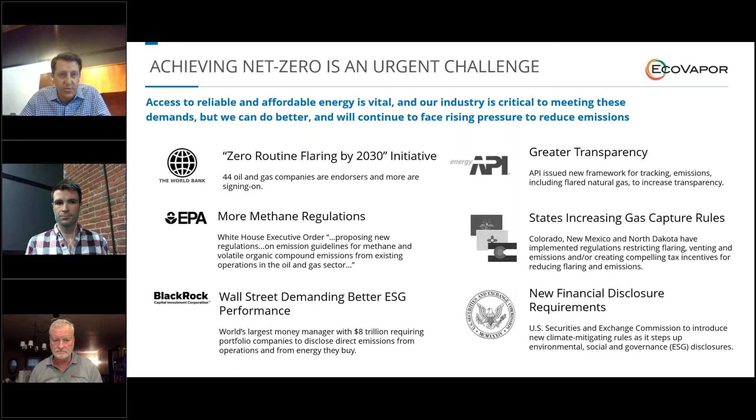A few statistics for you guys that we always like to start with here: first off, 40% of our carbon footprint in the industry is coming from venting, flaring, and fugitive emissions. So you're talking about 3 billion tons of CO2e emitted by the upstream industry annually, 80% of that stemming from the production process. And then 60% of that 80% is really focused on what we would call waste emissions - this is flaring, this is venting, this is your fugitive emissions.

We sit here saying, well, why waste these energy resources that we've worked so hard to produce? Why emit what we can sell? This is at the heart of who we are and the heart of what we do. So EcoVapor, we offer solutions to eliminate natural gas flaring and venting, and our goal is actually quite simple: sell more, waste less.

I think one of the things that we're very proud of is our value proposition that we like to talk through with our customers: one, that we can take a meaningful bite out of these emissions that come from our production process, but in the process, we also offer compelling ROI to our customers. We think this dual value proposition is powerful and something that we're very proud of.

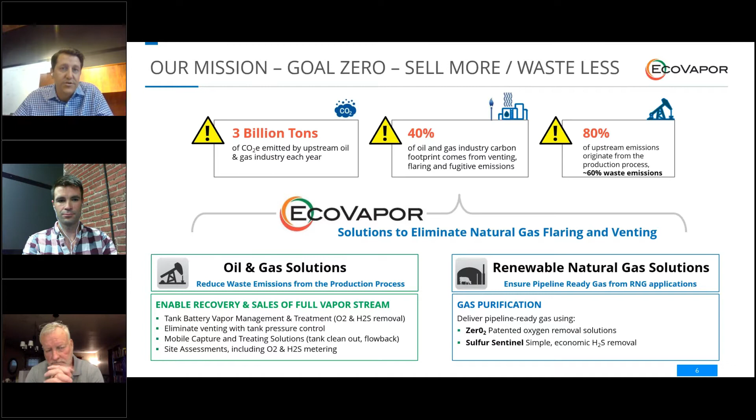Ultimately what we do, we offer products and solutions that are here to enable increased sale and decreased emitting of natural gas in both the oil and gas vertical, but as well as we've started our early focus on the renewable natural gas space as well - applications like landfill gas, applications like biogas, including swine, dairy, etc. But at the end of it, what we do, these products are all centered around the safe capture and treatment of gas to enable it for sale.

There's a variety of causes that can lead to what we would call your routine flaring and or venting. Probably the number one cause is just straight lack of takeaway capacity, gas takeaway capacity. So this is something that we've been addressing pretty aggressively in the lower 48 here in the US. You see more and more gas takeaway capacity in the major oil producing basins.

But another major contributor to why we flare and vent gas, and probably less talked about, is the contamination of these gas streams. Ultimately, if you're a midstream provider, or if your pipeline has specs and you fail to meet your oxygen or your H2S specs and you want to sell that gas, or if you want to continue producing, a lot of time your asset can get shut in because this gas is off spec.

And so these contaminants can come from a variety of sources. If you're talking about H2S, sometimes oxygen, it can come from the reservoir itself. But then if you look at the production process, you look at the tanks, you look at the tank loading, you look at some of these situations, air has a funny way of finding its way into these production processes, whether we like it or not, no matter how hard we try to keep them out.

And there are existing processes that we use to try to deal with some of these problems. You've looked at techniques probably like a gas blanket, where you increase the gas inside of the tank to try to keep some of this air out. That oftentimes can lead to venting if you have any type of surge in production. At the same time, it doesn't help in the truck loading process. You look at VRTs, a good tool to help separate some of these vapor streams, but it's all upstream of the tanks, and so you're still ignoring all of this gas that's downstream of the tank.

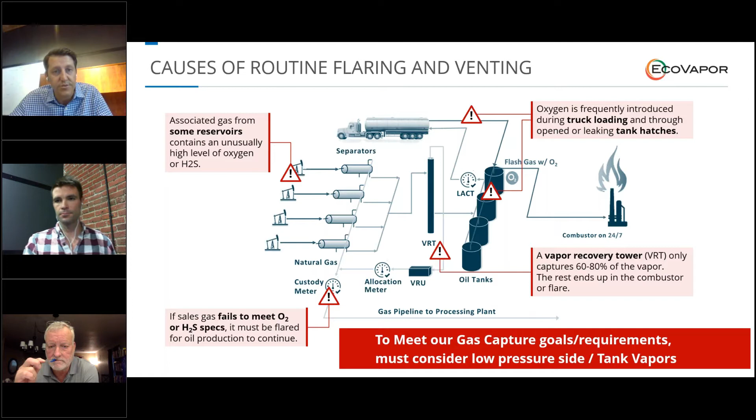So just to give you a little bit of a deeper dive on some of the products and solutions that we have, all centered once again around our theme of eliminating natural gas flaring and venting. As you can see, we focus largely on the oil and gas vertical and the renewable natural gas vertical.

Starting off here, tank battery vapor management. We have the ability to enable 100% gas capture. A lot of this is enabled by our ZerO2 product line, which we're here to talk about today, including the launch of the E100. This is centered around the ability to remove that oxygen from these gas streams, and ultimately enable 100% sales.

We also have an H2S solution, our Sulfur Sentinel, that is now out in a variety of applications in the oil and gas space, as well as renewable natural gas space. And then we also have solutions that can help to eliminate venting, and this is all based upon tank pressure control, the ability to use things like makeup gas and a blower to make sure we're managing that right pressure window to ensure that we are not venting from our tanks.

In addition, we have mobile solutions. We're starting to look at different applications that require shorter lengths of time of operation, things like a tank clean out or well testing, flowback, these other areas where we might be flaring gas unnecessarily for temporary operations. So how can we help to mitigate some of the flaring and venting from these processes as well?

And if you're unsure about what you might have out there, what the contaminants in your gas stream may be, or even what your emissions footprint may be, we also have the ability to run site assessments out on your sites for you.

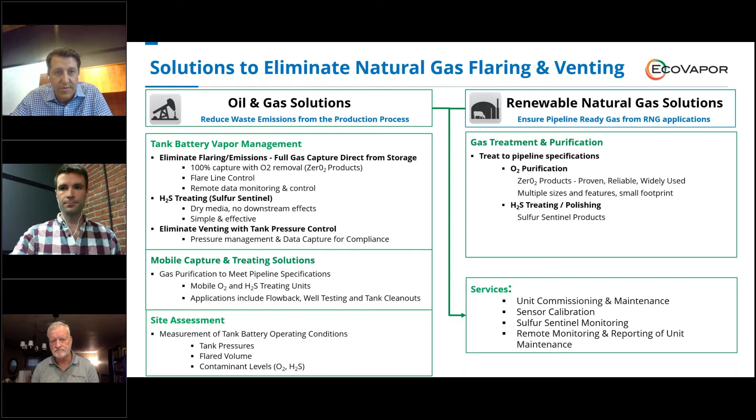But in addition, we're proud that we offer service on all of this. We're behind the scenes, generally with remote monitoring on all of our assets, and we're there for service and calibration whatever it might be. We also have service centers set up in major basins to ensure we're there for proper service of our assets.

Ultimately what the ZerO2 is here to do is decontaminate that gas stream to ensure that the gas pipeline running to the processing plant is sales ready, that there's no risk of shut-in, and it also enables you to turn off that flare.

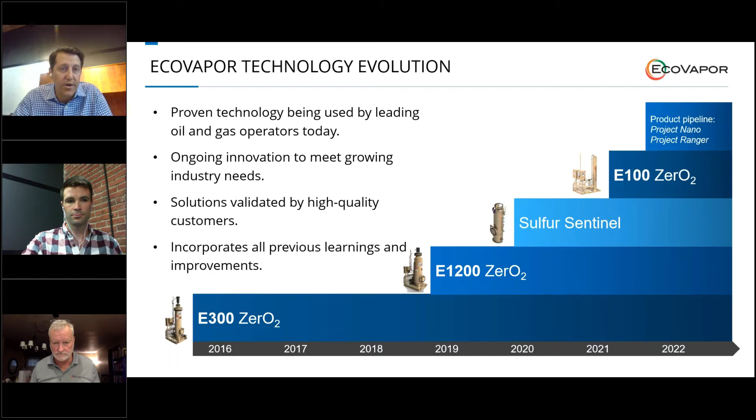As an introduction to the E100, it's probably good to introduce you to the rationale as to why we wanted to develop this. We wanted to introduce solutions that don't just help on day one of production when we have large volumes of associated gas, but something that's economic throughout the well's productive life. This enables longer term relationships with our customers. Ultimately, we want to say we have an economic solution for every stage of your productive life on these assets.

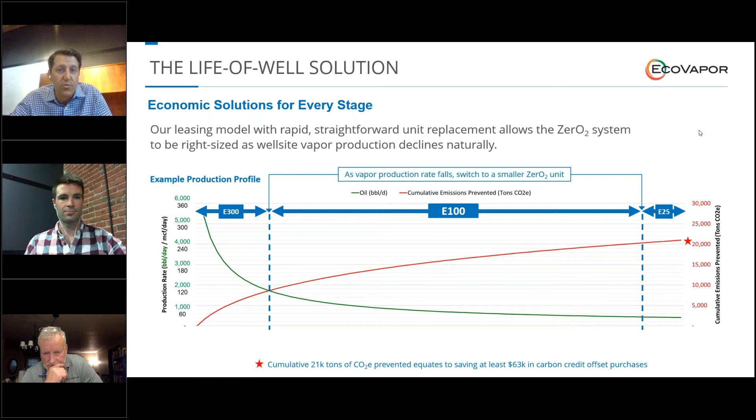So with that, I'm now going to pass over to Hans to talk to you a little bit in more depth about the E100.

Thanks, Jason. We're excited to introduce the next step in the path to zero routine flaring of tank vapor. Let's jump right in. The E100 builds upon everything EcoVapor has done and learned from operating tank vapor processing and purification products for the past 11 years, namely the E300 and the E1200 ZerO2s. But the smaller capacity of the E100 means operators now have options focused on the economic capture of smaller emission streams. So saying it differently, we can still get it all.

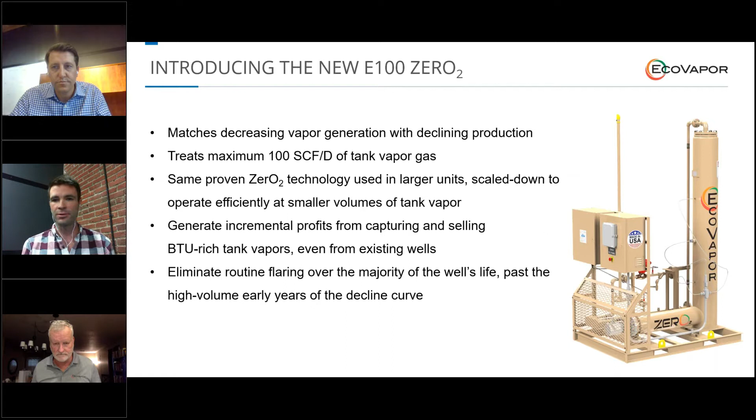The E100 is designed to purify tank gas streams of up to 100 MCF per day. Just like always, so that we can meet midstream gathering specifications, and all that vapor, full capture, all that gas produced on the site, can be sold. So today we really do have a choice whether to flare or not, even at existing sites where production has already declined.

We started out testing with about 5,000 ppm with great results. You can see that O2 on the discharge was barely affected, if at all. Keep in mind the pipeline sales tariff is 10 parts per million. So after those initial results, we cranked it up to over 20,000 parts per million at the inlet of the skid — that's 2% oxygen, or about 10% of the overall stream being air — and the E100 handled it all. By the way, the prototype has been running flawlessly without a single shutdown since startup.

We're proud of that. And the production models we're starting to put out in the field are even more versatile than that test unit. So if it's all right, I'd like to take a quick look at that test while it was happening live.

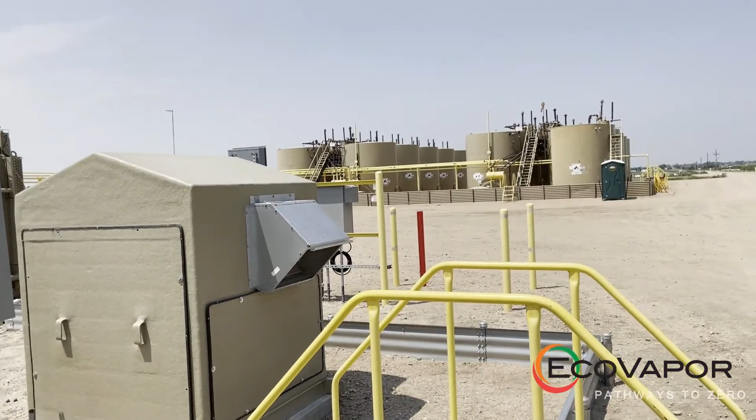My name's Eric Anduri. I'm the engineering manager at EcoVapor Recovery Systems, and we're here today testing out our ZerO2 E100. It's a smaller version of our E300, which we have a lot of out there. What we have is a VRU pulling gas off of the tank battery you see over here. In order for it not to go to a combustor or flare, it comes through the compressor, then through our ZerO2 system here, where all the oxygen gets removed, and then that gas goes down the sales line.

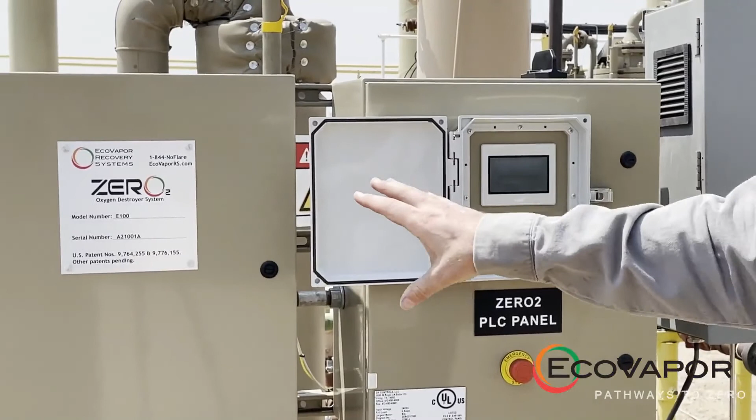What we have is an oxygen analyzer cabinet here. This is our PLC control cabinet.

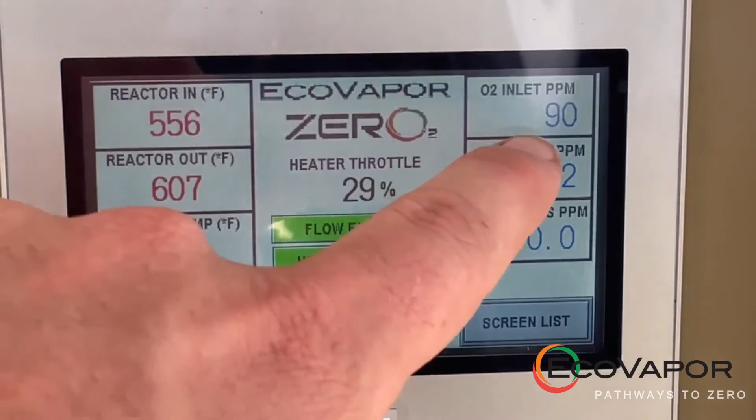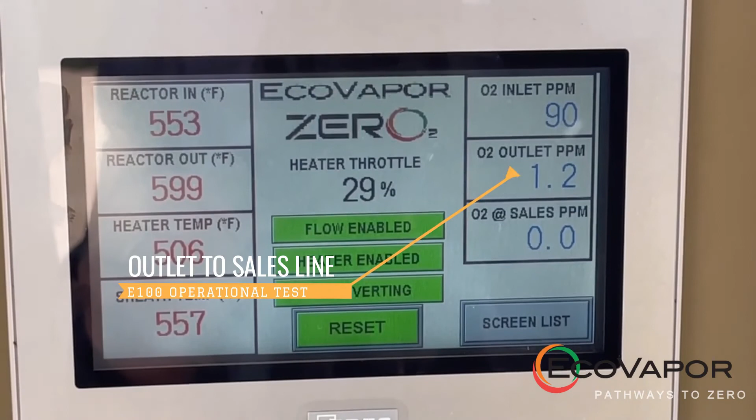We're looking at a ZerO2 touchscreen, and what we're going to do right now is run a little test where we actually inject air into the inlet of the ZerO2. What we expect to see is that inlet O2 on the top right of the screen is going to increase, potentially up to 10,000, maybe even 20,000 ppm, and we'll see that the outlet oxygen will be much less than that. I'm going to go ahead and run the little test here.

Here we go. Starting to see oxygen on the inlet. We're simulating the oxygen coming from the tank vapor, which is a common occurrence.

Okay, so we're at 6,000 parts per million. That's 0.6% oxygen right now. We're hovering about 7,000 now, and keeping it pretty low on the outlet there. I'm going to go ahead and increase it a little bit too.

We are reporting this into our SCADA system, reporting it onto our platform where we can see it anywhere in the world.

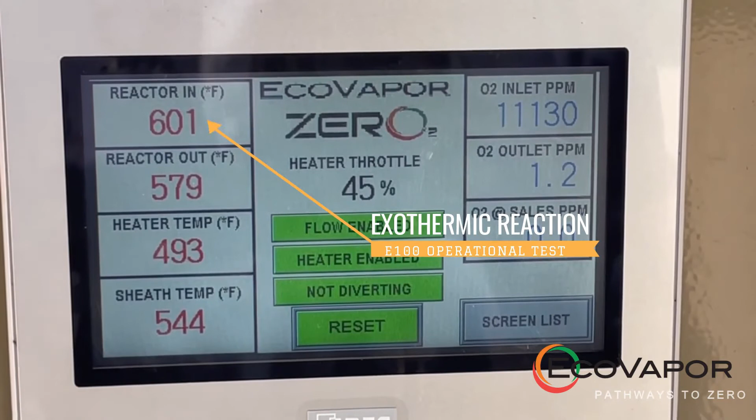So now we're doing good. Now we're cooking some oxygen. Got over 1% now, over 10,000 ppm. Our reactor temperatures have increased slightly here, which is expected with that much oxygen. And doing great on our outlet, still basically 0 ppm on the outlet.

And I think that's the bottom line, 0 ppm at the outlet. That allows us to sell it all.

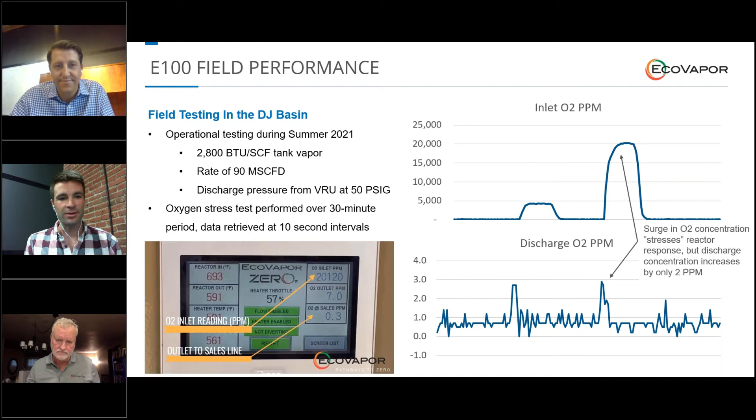We definitely had a lot of fun testing the E100. And if it's okay, I'd like to highlight the ESG performance along with some of the economic benefits of full vapor capture with the case study.

So let's take a look at the same facility in the real world that was configured a couple different ways. We measured the results of each configuration, and let's take a look at how they compare.

In the first scenario, for the first 77 days of the test, the initial 11 weeks, a vapor recovery tower was employed to capture flash vapor upstream of the tank battery. Separators were held at 50 psi, and the VRU maintained a 3.0 psi target pressure at the VRT.

All vapor generated within the tank battery, as well as oil hauler vent vapor and vapor associated with the water stream, were flared. That way they were able to control the emissions the way they did, and they also didn't need to worry about oxygen content exceeding the pipeline's 10 ppm tariff.

So said differently, flaring was continuous 24/7. This setup established a baseline for oil production and recovered vapor volumes so that we could compare them to the second test.

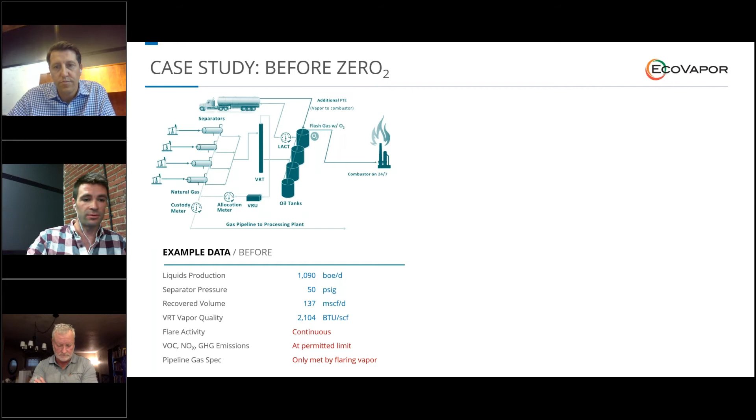In the second scenario, this was actually run subsequent to the initial one, so we're a little bit further down the decline curve on the second set of 77 days.

In this instance, the VRT was bypassed. In the slide, for simplicity's sake, we show it removed, but actually we just routed around it. So all liquid hydrocarbons were sent directly from the separators straight into the tank battery itself.

Also, a liquids knockout and active oxygen control were installed, tied to the same VRU that was on site before. In this case, it was reconfigured so that the suction was coupled with the vapor space of the tank battery directly, and the discharge from that compressor would flow straight through that liquids knockout and the oxygen control skid that we call the ZerO2.

The VRU was set to maintain a 4-ounce pressure target at the tank battery itself. So now the tank pressure is actively controlled rather than passive emissions control, where you require the tank battery itself to pressure up to push that rich vapor over to the flare tip.

As far as production, the flare was turned off because all of the vapor was being captured, all of it, including the oil hauler vent vapor. So the only flaring that occurred during this period was associated with VRU downtime, and that was just during some routine maintenance and an oil change.

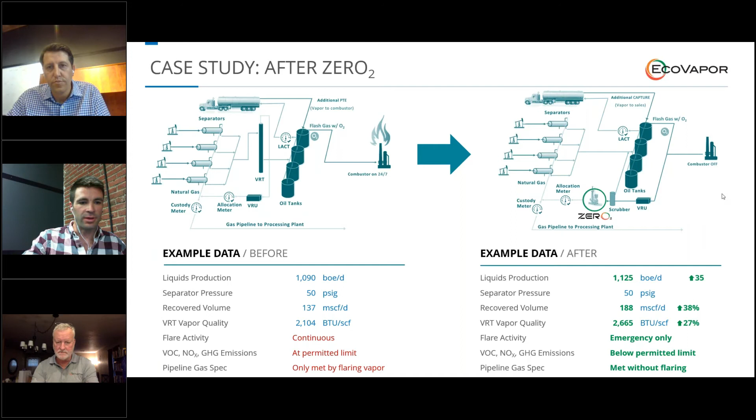So we saw about a 3% increase in oil sales. And again, that's been absolutely repeatable.

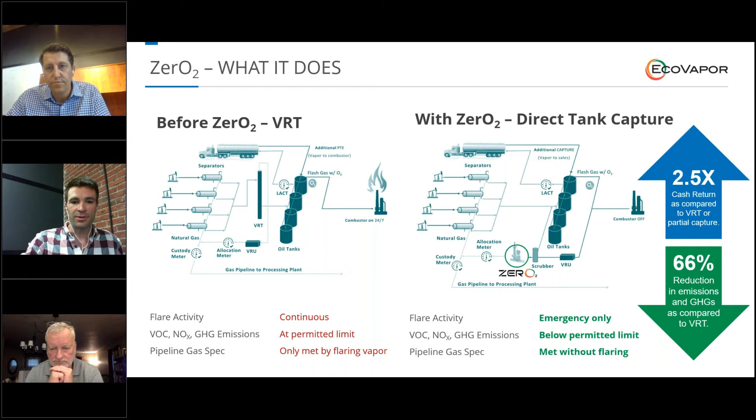Breaking that down, what we're seeing is that we got about 2.5 times better ROI than using a vapor recovery tower alone. That's simply because you're able to capture the full stream of gas and also sell all the liquids as liquids. This also resulted in about a two-thirds reduction in regulated pollutants, as well as unregulated greenhouse gases associated with the full recovery. And again, these results are absolutely repeatable. You're able to see the production uplift day one when operation starts, in every instance.

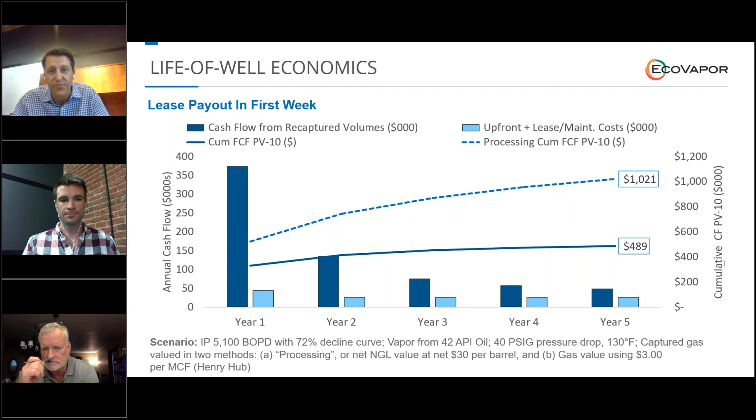And if you can also get credit for the NGLs, depending on what your contracts look like, upwards of $1 million of free cash flow over this time. So once again, meaningful economic uplift to the operation, in addition to the meaningful reduction in the emissions footprint.

This is an application that took us—I actually think Jeff himself, who's on the call with us today, was out doing this application. And I think he showed up in the morning and it was running by that afternoon and selling gas later that afternoon.

So ease of installation, and what we believe are compelling figures, even for some of these mature fields or brownfield applications that you may have in your asset base today.

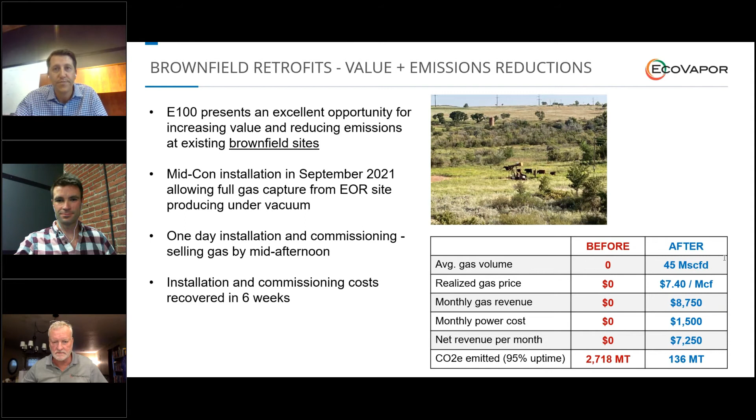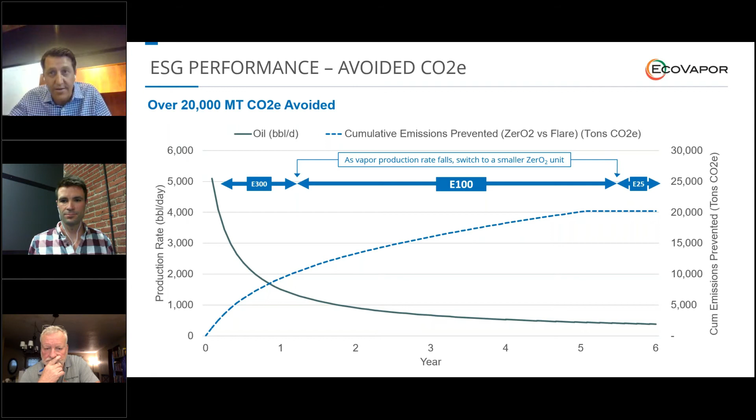And so now with that, I'm going to hand back over to Hans to talk through one other item that we're very proud about, which is actually our ease of operation. We pride ourselves on being transparent to the customer, and our ease of operation, our ease of installation, is something we're very proud of.

Thanks, Jason, and that is absolutely right. We sure are. Ease of installation, operation, and maintenance really were some of the primary objectives identified when EcoVapor set out to build and design the E100.

Something that's been important to me since day one of EcoVapor is ensuring that we're designing and producing equipment that fits into your site operations, not the other way around. You shouldn't have to bend the way y'all are doing things just to fit a new technology into the site. And I think the experience we've gained over the past 11 years is really on full display with the E100's ease of installation and operation.

If it's all right, let's demonstrate that live with the first install.

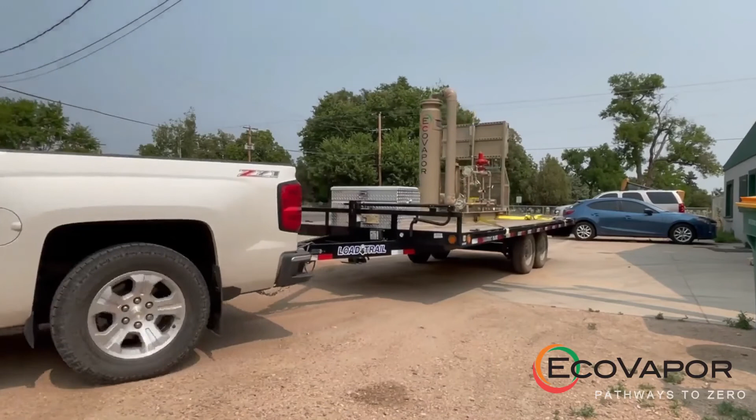Loaded on our trailer is our very first E100. We are going to be going out to a location for an existing customer. They currently have an E300 on location. We are going to be taking that E300 off location and installing the new E100.

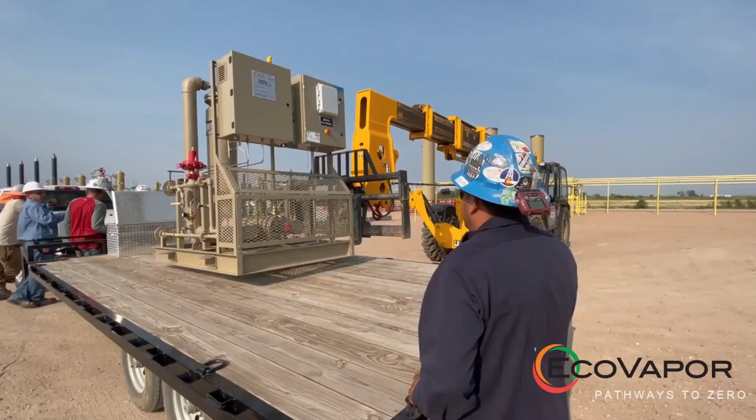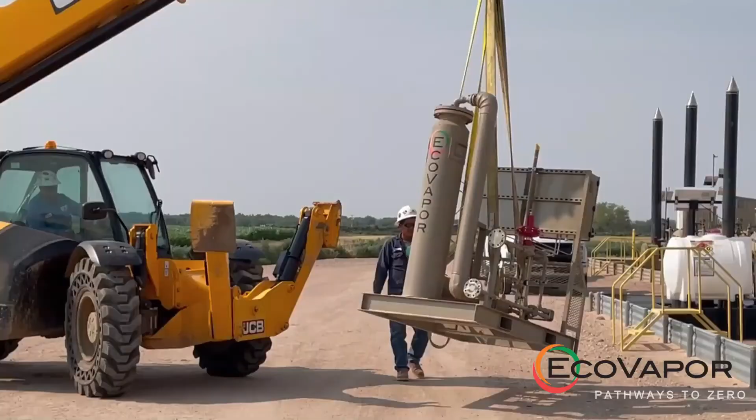They're downsizing. At this particular location we had two E300s at one time when the facility first came online. We have since removed one E300 and only have one, but production has declined to the point where an E300, even just one, is uneconomical. So we have designed a new E100. This is the very first one that we will be installing and testing.

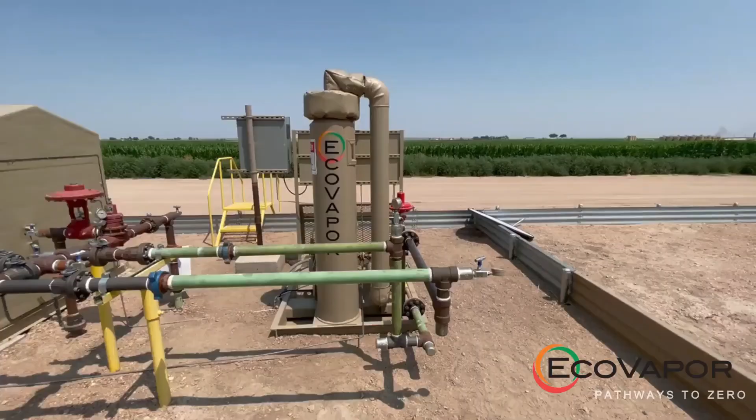Awesome. Yeah, the E100 really is easy to install, both for initial installs as well as what Casey was just talking about there, where we can replace the higher capacity equipment. It could not be easier.

In that second scenario, or I guess what we just witnessed, where the equipment starts out right-sized and the well site progresses along its life cycle, production declines. When you do replace with the E100, no modification of the facility's piping is required. We've designed it so that the inlet and outlet flanges, those are the only two process connection points, are in the identical spot as they are in the larger units. So this allows for a quick swing of the skid and bolt-up, and then you're off to the races.

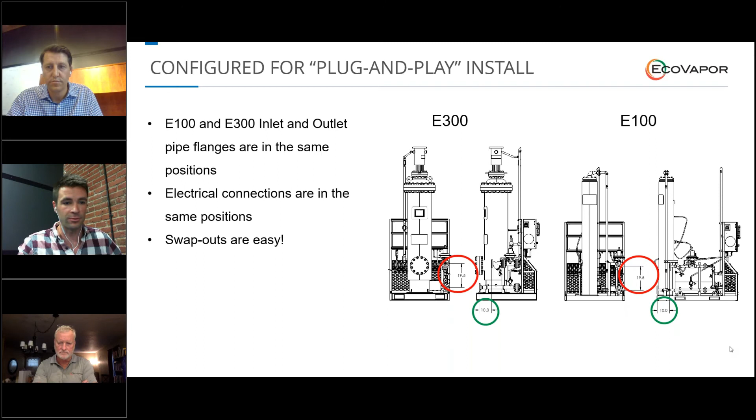When the higher capacity E300 is replaced with an E100, the operator typically relocates the larger equipment to new locations where its capacity matches the initial production rates. EcoVapor encourages this, actually. We assign leases to the skid itself, not the facility. And of course, that's true for new installations as well.

But we've made these as easy to move around as we know how to. They've got built-in forklift slots, lifting eyes on both the E100, E300, and 1200, and it makes moving their small footprint around a breeze.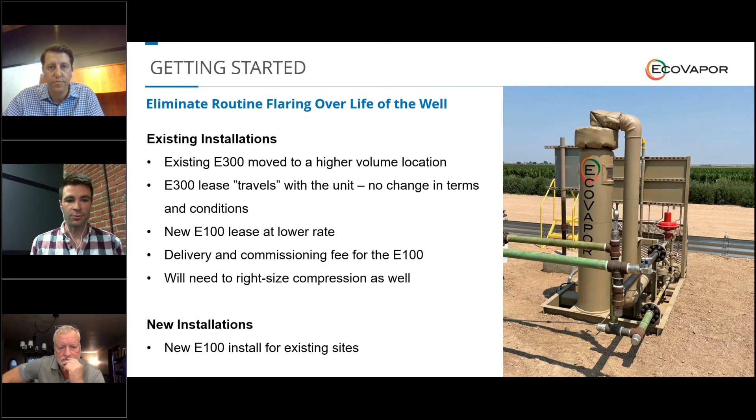What we found is that, and really what our goal was, is to make sure that the E100 represents the next step in the industry's progression to zero routine flaring and facilitating full tank capture. So now operators are able to reliably eliminate routine flaring emissions over the full life cycle of the well, so that you can continue to convert that waste stream into revenue.

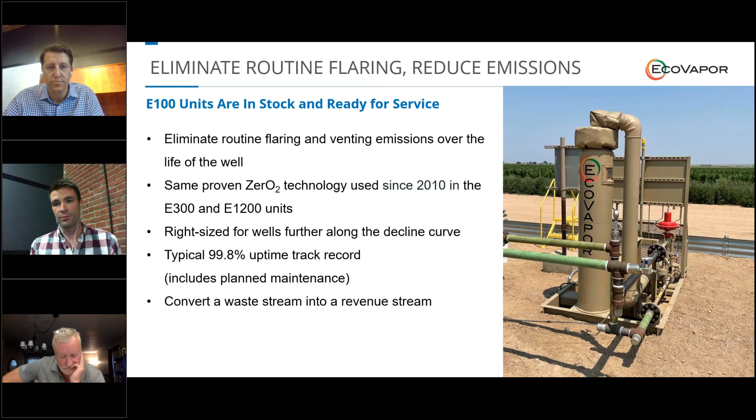One question is whether the different sized models have differences in features or operation. The goal was to preserve all the sensing data and performance. What you're looking at with the E100 is just a scaled down version of the E300. We still have oxygen analyzers on board to ensure performance is met, using the same proven catalyst, same technology, same approach. Beyond scaling it, we just tried to make it as easy as possible to work on. The catalyst swaps are a breeze, still on track to happen every 12 to 18 months. So it's just kind of like the little sibling.

There's a couple questions here that are similar. One is, what's the operating range of the 300 and 100? Another participant asked, is there a certain time you'd switch, and how would you know? That's a great question. We do have a little bit of overlap in the operating capacity of the E300 and the 100. We get a turn down ratio of about 6 to 1. An E300 is capable of treating down to about 50 MCF, and in some instances lower. But economics are important to us, and we want to facilitate good returns to operators, so there's a little bit of overlap built in there. It doesn't have to happen on day one, and the cutoff isn't at 101 MCF.